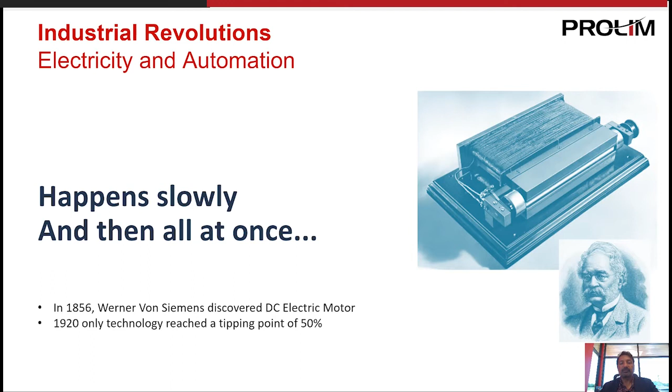The innovation really started in the third revolution, where semiconductors and electronics came into place to start building automation. And in 2011, during this time, there was a lot of technology - the internet revolutionized things but was applied to general business, whereas it was not being adopted well in the manufacturing industry. The German government came up with this Industry 4.0 vision focused on four pillars.

One, the product to be manufactured has all the data necessary for its manufacturing requirements. Two, the organization of networked manufacturing equipment. Three, flexible manufacturing based on the current situation. And four, human remains essential as the creative planner, supervisor, and decision maker.

With that vision, as you can see, this fourth industrial revolution - the industry started from the steam engine, and today at Industry 4.0 we're focusing on cyber physical systems, Internet of Things, and networks. The products are getting smarter and complexity is increasing. Automakers are developing advanced driver assistance systems to support demand from new consumers.

There are new forces changing manufacturing in ways we haven't seen before. One is changing how products are realized - advanced robotics, intelligent automation, and additive manufacturing - and the way ideas come together, with crowdsourcing, systems engineering, and applying analytics to improve product design and improvement.

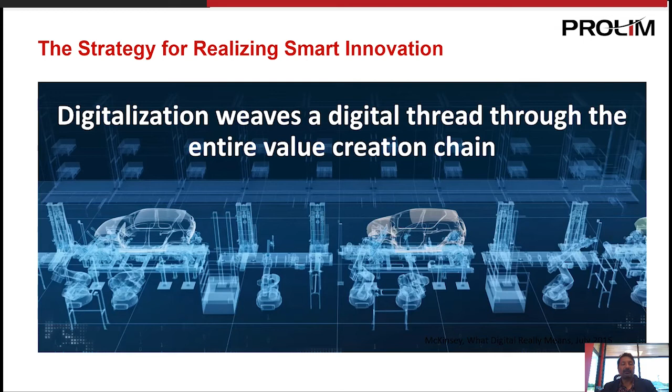You might have heard about digital twin and digital thread. Digitalization weaves a digital thread through the entire value creation chain. Without digitalization and digital transformation, it is hard to survive in this market.

Innovation has three things: one is ideation, at the other extreme is utilization, and in between is realization. Smart innovation is about bringing all these three together and making it realize and innovate the products.

The innovation platform has engaged users, intelligent models, realized products, and adaptive systems. Prolim has worked hard in the last few years and built IoT solutions to enable this Industry 4.0 vision. We branded those products under the brand name Fascia.

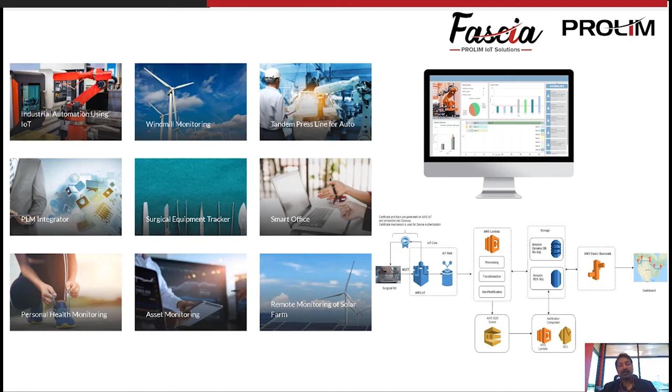We have at least 6 to 8 solutions out there, from industrial robotics automation to windmills, and the tandem press line where sheet metal enters one end of the assembly line, and the doors or the hood come out the other end, and so on and so forth.

We helped our customers globally. Here is an example of our customer KSS, where we help to bring innovation in their journey of active and passive safety.

If you look at all the business cases, you can apply IoT solutions to reduce the maintenance cost, to anticipate and reduce FDA audits if you are a med devices company, and manage appliances or assets, the repair process, quality issues, CAPA, utilization, sustainability, and complexity. Any piece of your organization's operations, you can apply IoT solutions to drive value, improve efficiency and throughput.

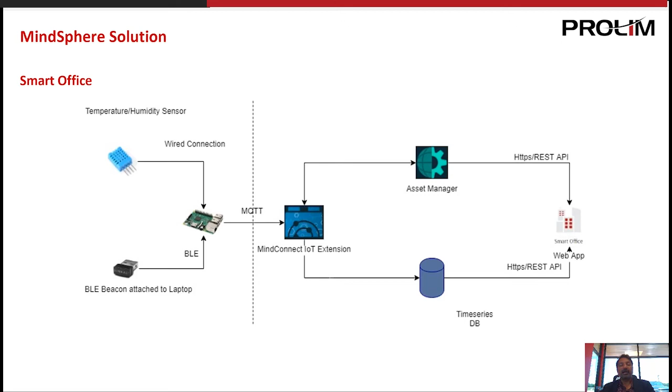Here is an example of a smart office where we built a very simple solution quickly within a week's time frame, where we track all our offices globally, from India to United States, managing the humidity, temperature, and how many laptops and equipment are inside the building versus the events outside the building.

Here is a simple application. I can walk through this a little bit. When you log into our smart office, it will bring up the map, and when you drill down and pick any location on our map, it will show the temperature, laptop counts, etc.

If you drill down further, it will show you the entire details about how many laptops or equipment are inside the office or went into the warehouse. At the bottom, you can see real-time temperature and humidity.

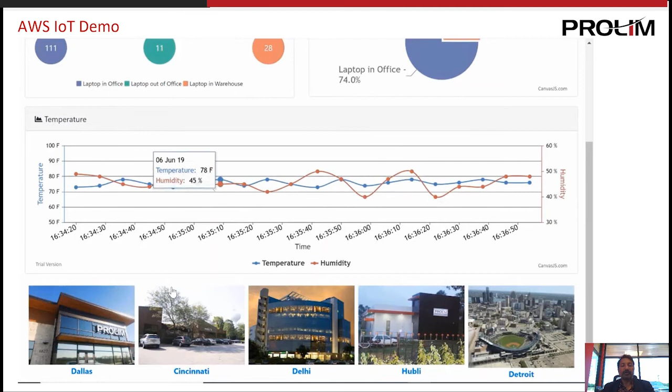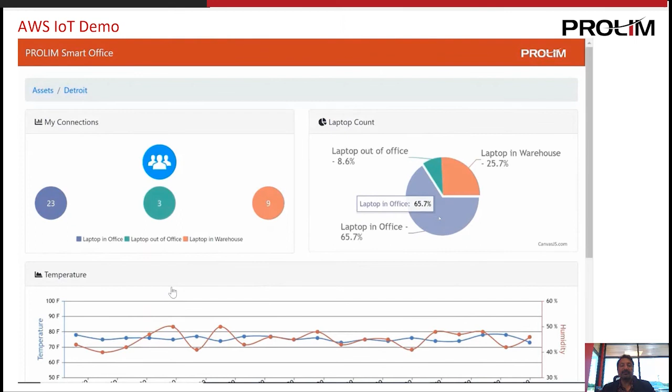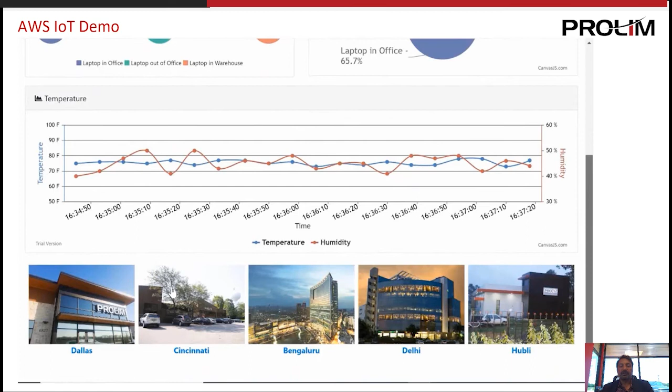If you want to pick anything on this dashboard based on our office location, it will demonstrate those three parameters. What you see is a very simple example that we built in 7 days, but it could be your automotive equipment, your windmill or wind farm, or your surgical equipment in the medical devices industry, and so forth. We can build those applications based on AWS or Siemens MindSphere in 2 to 5 weeks as a prototype.

So we track all these parameters based on the conditions in the field, and if there is any potential breakdown of the equipment, or if the breakdown happens, we know instantly what happened, what the parameters were at this point in time, what the environmental conditions were.

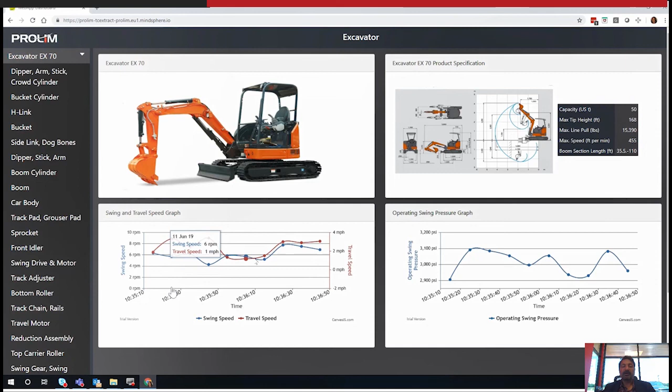You can feed that data, that information, back to your R&D, to your Teamcenter and NX tool, to design and improve that particular component or system or subsystem.

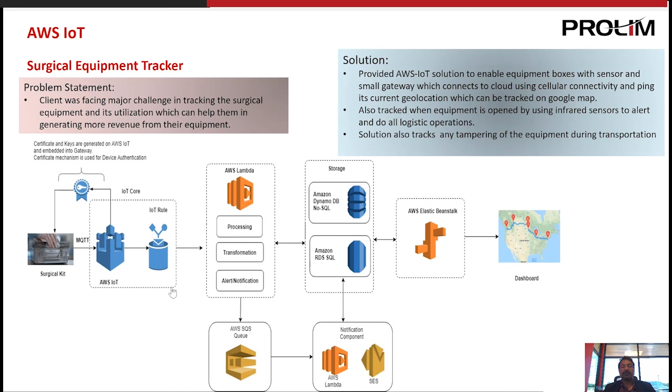Here is another example of a smart office, and another example of a surgical equipment tracker that tracks equipment from when it leaves your laboratory to the hospitals, and tracks it along the way.

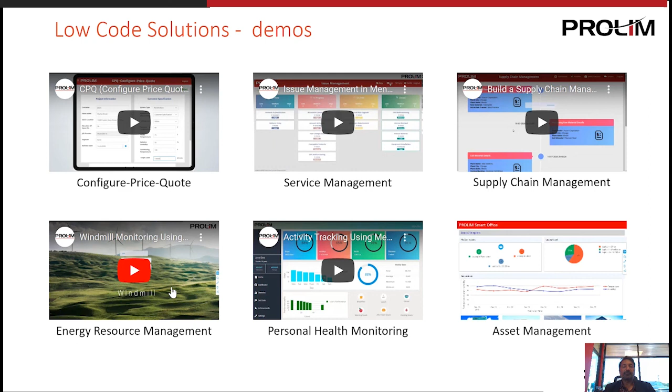And here is another patient monitoring solution, along with some low-code solutions that we have built to automate your Industry 4.0 solutions, or fill the gap in your solution from configure price to quote, service management, supply management, and so on.

The entire concept we put into our digital transformation platform that we built on the Mendix platform, from concept to configuration, different rule streams, CPQ, NPI, bringing the CAD BOM, engineering BOM, and PLM, ERP, and program manager and quality system all together to define a digital thread and help you with digital transformation.